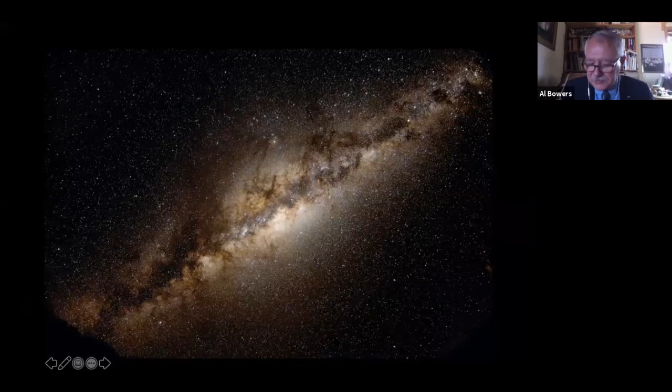The presentation you're going to get today is based on one that I give to students. I talk a little bit about myself and try to get them to take a risk, put themselves out there, and sometimes that's difficult. Many of them are afraid of making mistakes. We train kids at school that getting the right answer is the most important thing. That's not necessarily the case. You really want them to be able to use their imagination and creativity to try and find solutions to problems. Einstein understood this very well: imagination is more important than knowledge. You'll see that occasionally I pull in ideas from people who had really brilliant ideas along the way.

A little bit about me. I was not a native English speaker. When I came to the United States, the only language I spoke was Japanese, and the first day I had to speak English was actually my first day at school.

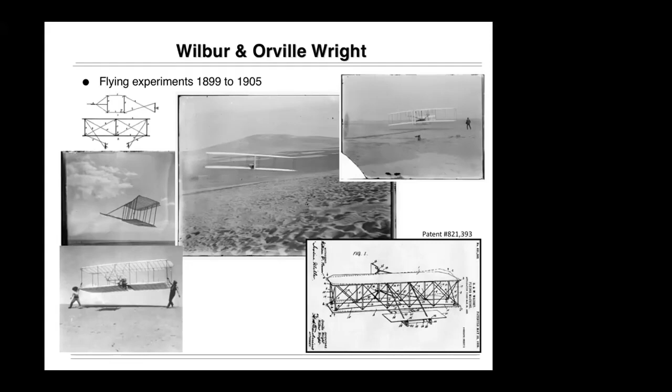It was the control of the aircraft—being able to control the roll and the way they used the rudder. There was a misperception at that time because everyone thought airplanes would turn the same way trains did, and automobiles for that matter. A two-track vehicle simply turns its wheels and moves in yaw, but that's not the way aircraft turn. Aircraft bank to turn, and the Wrights understood this because before this they were building bicycles, and they understood what it was to bank in order to turn—they were trying to do the same thing with the airplane.

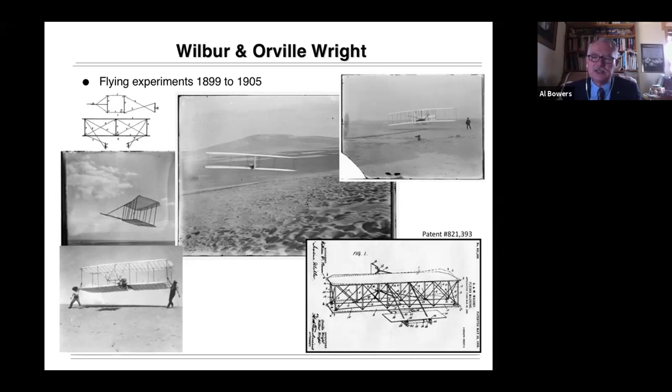Why did they have this problem with more lift and more drag? Ludwig Prandtl is the first one to come up with an analytical tool, which he calls lifting line theory—an analytical tool for wings. Prior to this, if you changed the wing, you had to go back into the wind tunnel to see what those changes did. Prandtl gave us the tool that allowed us to calculate the effect of changes to the wing.

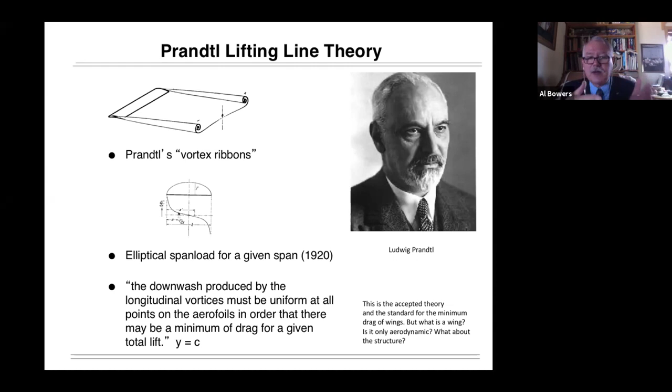We all know that the feathers on birds are very soft at the tip, so we know you can't carry a very large load there. In the elliptical load case, there's a very large load that disappears very abruptly right at the wingtip, and because of this, we have wingtip vortices. We still see this today.

Aerodynamicists love these photographs. One of the worst things you can ever do is go to a dinner party and ask an aerodynamicist about those wingtip vortices—it will be the last thing you talk about for two hours.

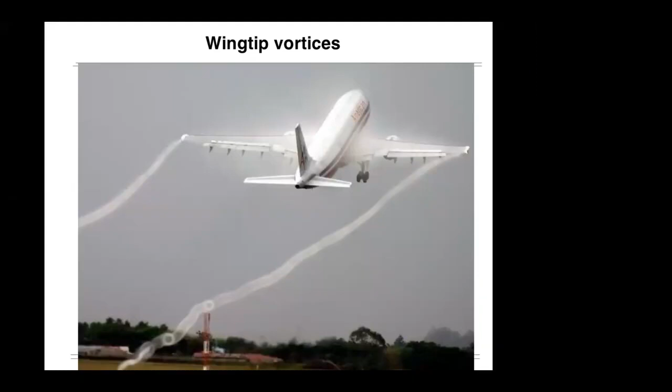There are hundreds, if not thousands, of these photographs on the web because of this particular way that we design aircraft. Sometimes you can see the elliptical load itself, and on rare occasions, you can even see both. Aerodynamicists love this. But along the way, we've forgotten something fundamental about the way birds fly, and we no longer look to birds as a model for flight.

It turns out that Prandtl did another solution for the minimum drag problem, and he did it in 1933. You'll notice that curve C on there is his new solution. Out there at the wingtip, the load comes down and the slope of the load goes to 0 just at the instant that the load itself goes to 0.

This is a different way of thinking about the load. If you think about the feathers on a bird, you think perhaps this load could be the way that it works. There's also something else that happens: the load is convex downwards to a certain point, about 70% of the wingspan, and then the load becomes concave upwards. So you have this inflection point that's at about 70%. There's a reason for that.

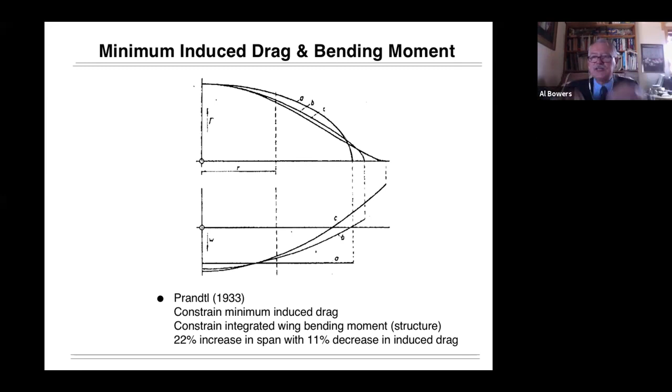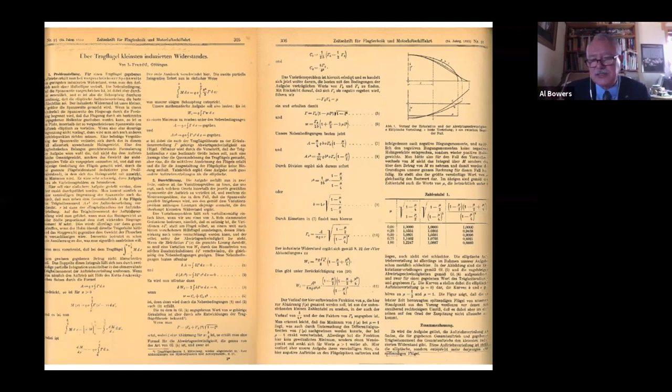So this is the actual derivation that Prandtl does. The amazing thing is Prandtl never references this paper again for the rest of his life, 20 years actually, and there are only a handful of references made to this particular paper. Some of the people we're about to talk about who studied things around this problem also didn't do anything with this particular solution other than to mention the fact that it existed.

When I would read this paper, by the way, my head would hurt before I understood the problem. I could not see how you could end up with negative drag. I had this stack of 6 papers that were sitting on a folder on my desk, and I would just read these papers and struggle with them. I knew there were pieces that were connected between each of these papers to the problem, but I could not figure out what the connection was. I always thought that these people understood this, that to them, the problem was trivial.

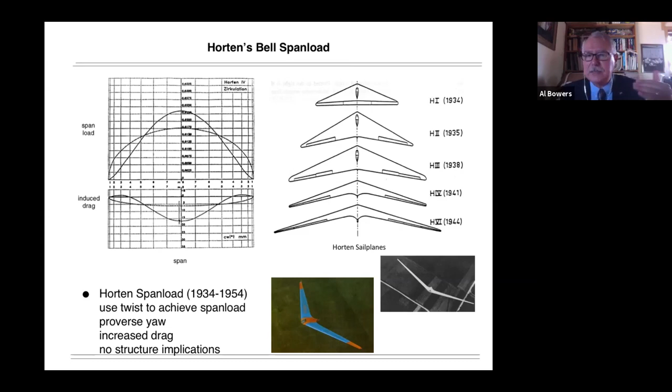And in fact, that's not the case. I remember when I finally did figure this out, that it was actually quite terrifying for me. As soon as I had figured this out, I realized that I knew something that none of these people did. And that was a very scary thing for me.

R.T. Jones, great American aerodynamicist, worked for the NACA and later for NASA. I got to meet R.T. Jones when I was working on the oblique wing. That was also his idea.

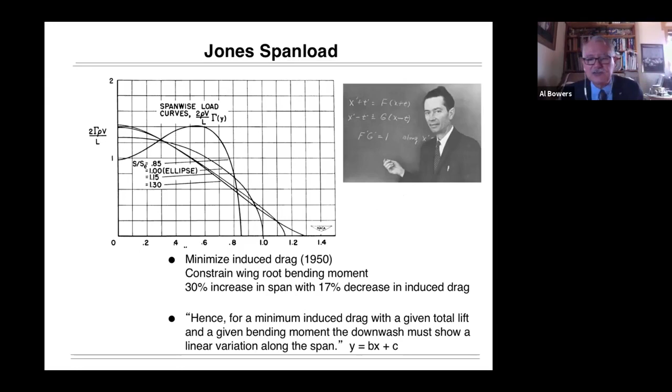Here, he constrains the wing root bending moment, so it's only one point on the structure. It's a unique solution related to the one that Prandtl did. Jones published this result in 1950.

Klein and Viswanathan published a minimum drag paper where instead of using the bending moment, they used the integrated shear on the wing in order to try and constrain the solution.

Something I should mention unique about this result: all of these people I'm talking about here are dead, except for Satya Viswanathan. He is still alive, he's 73 now, and he's actually very funny to talk to, hilarious. We should probably call him up and find out how he's doing. He runs a desalinization plant in India, where he's from, and provides fresh drinking water to the city where he lives because of this plant he's created.

And this was one of the last solutions that got solved. When he heard that we were actually building some of these vehicles to try and look at the span load other than the elliptical, he got very excited. It was actually quite funny, an amazing thing talking with him.

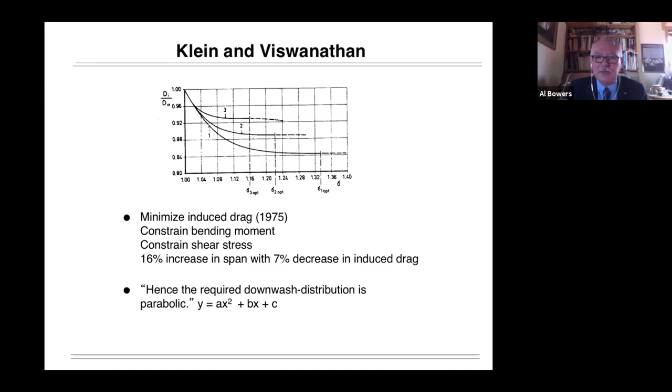And even though Whitcomb had all this data pointing to this solution, Whitcomb never said this. This was the key piece that I suddenly realized: how you could get an induced upwash on a particular part of the wing, and end up with a negative drag, with thrust. This is what birds were doing, because if you increase the lift in this case, you would increase the thrust. And if you could do this, then as you lift the wing up, that wingtip would move forward and you wouldn't need a vertical tail.

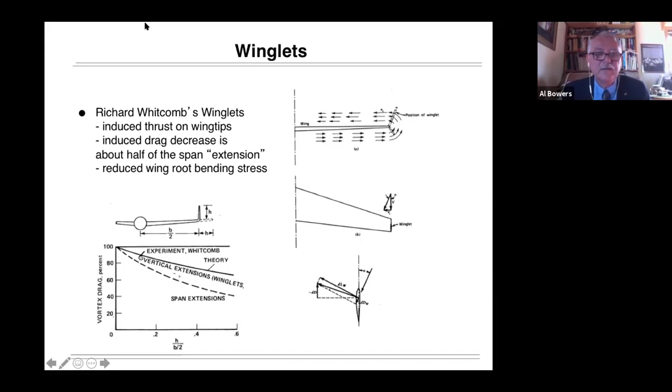Okay, how would we prove this? We need flight mechanics to show this. We call it proverse yaw instead of adverse yaw. How would you quantify the amount of proverse yaw, and where in the envelope would that occur? And then could you prove that you were actually getting the aerodynamics that correlate with Prandtl's 1933 paper? And then we wanted to show the connection between Prandtl 1933 and bird flight.

And so what we ended up doing, when I first calculated this, I couldn't believe it would work. I knew what rudder pedals were for. I flew sailplanes, and having that understanding, I knew that if you just used roll control, the yaw would not be correct.

I had a student working for me at that time, a kid named Mike Allen. In fact, I had a short conversation with Mike this morning on Facebook. And Mike said, give me those numbers, I know this will work.

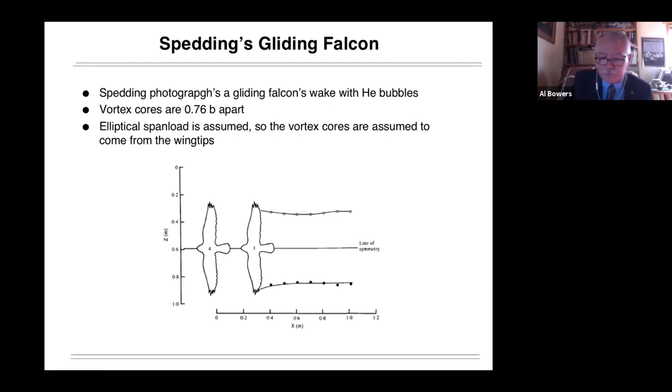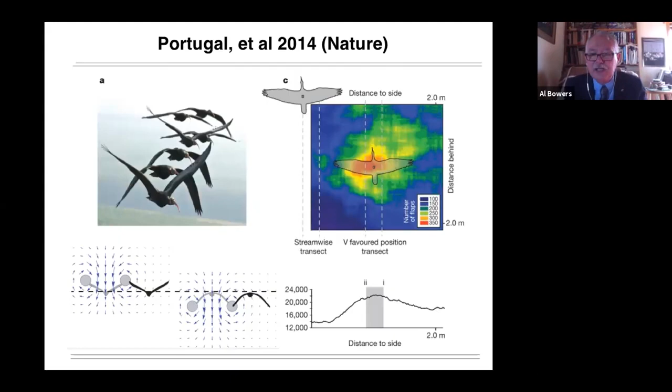There was a paper in January 2014 published by Stephen Portugal and Jim Usherwood, and they were looking at the northern ibis. Again, they were looking at what the overlap was between the wings. There were other people that had done similar things — Hainsworth, Cutts and Speakman and Banks.

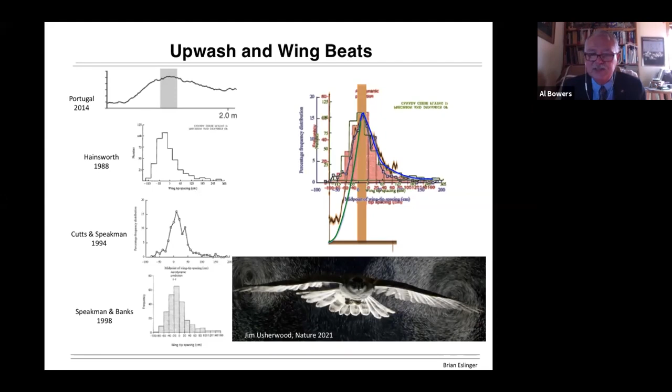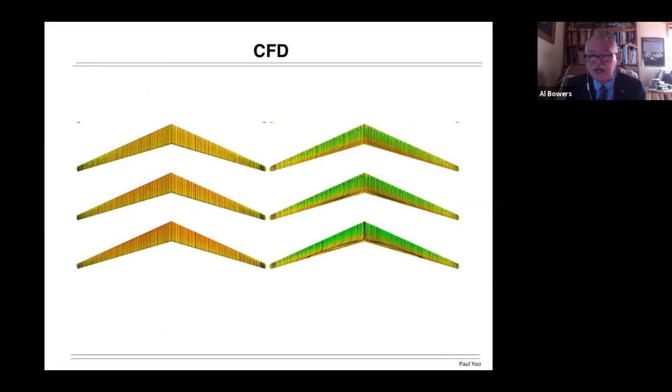It turns out that the first person to describe the twist in the wing of a bird was Nachtigall, a German student studying at UC Berkeley. He published his paper in the Journal of Experimental Biology in 1966 on how much twist was in the wing of a bird—these were pigeons. The amazing thing to me is, if someone had actually calculated the lift from these birds, we would have known the answer in 1966, and you wouldn't be sitting here listening to me now. But no one did it in all those years. So I happened to be the first one to stumble into this answer, and it was only because I had almost all the information. There was about 20% of it I still had to figure out—the thread connecting all of these.

So we've turned this into a technology and built it into these little gliders and instrumented them, fully instrumented. And we actually went out and found that indeed we have proverse yaw.

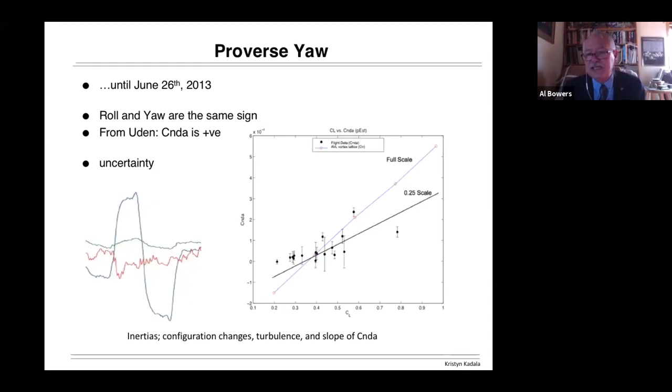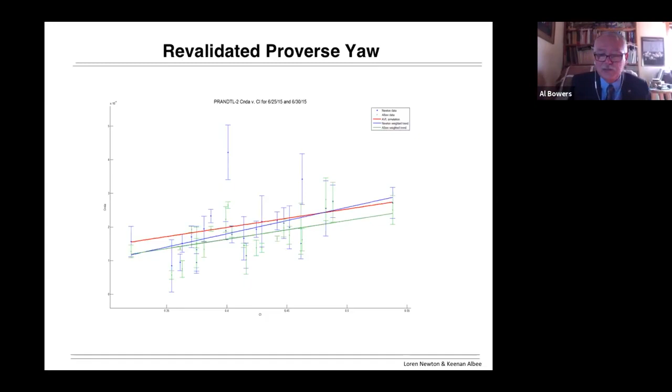We did this in 2013, by the way, and that was the first indication that truly this yaw and roll were connected the way we thought. So in 2015, I did this with students again, and this time we had 58 data points. I had two groups, and we ended up with the red line and the green line—excuse me, the red line is the old Prandtl data, and the green line and blue line are the two teams of students. I forced them to have their uncertainty on each of the data points they generated. So this was the way we knew we were on the right track.

We have another, larger vehicle that we put some aerodynamic test equipment on. We had fiber optics to actually measure the deflection of the wing, hoping we could invert that and solve for what the load was. Unfortunately, the noise in the system was a little too large—I didn't design the experiment correctly. I made the wing too stiff for the sensitivity of the deflection equipment they had.

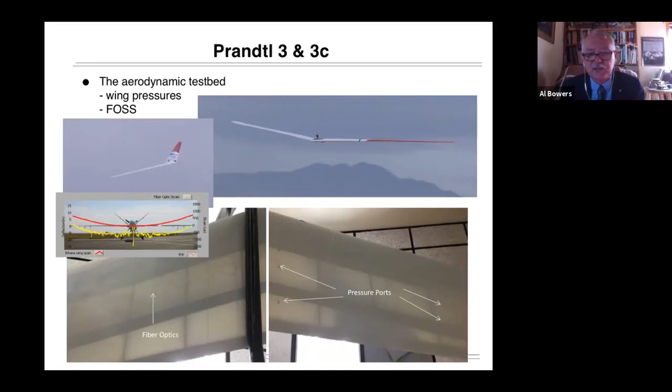On the other wing, we had a series of pressure ports, and we actually built—oh, I want to show you. Let's see if I can make this do this. Okay, this is what it looks like when it flies.

This is the second flight of this vehicle, by the way, with a large rubber band launching the vehicle. It weighs about 25 pounds, with a 25-foot wingspan. We're off the rubber band now. The deflection of the control surfaces is direct from the little control stick on the radio control unit to the vehicle itself—there are no feedbacks.

We're not augmenting the data coming into any sort of flight control computer or anything—this is strictly from the stick to the control surface position. And you can see how well behaved the vehicle flies.

It was a day just like today.

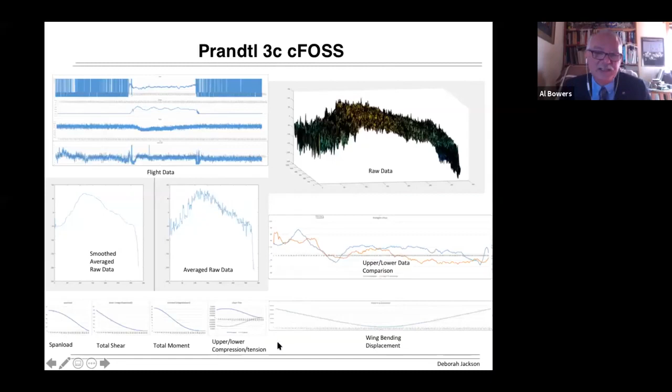So this is the FOSS data. You can see the amount of noise that's in the system. I just could not get this to work the way I wanted.

This is the pressure instrumentation that we installed in the vehicle, and here's the actual pressure data that we got over the wing. The upper left is near the center line of the wing, and the lower right is all the way out at the tip. The red is the upper surface and the blue is the lower surface. If you measure the area of each one of those, that is the lift at each point. You can actually see how the lift tapers off as you come from the center line out to the tip.

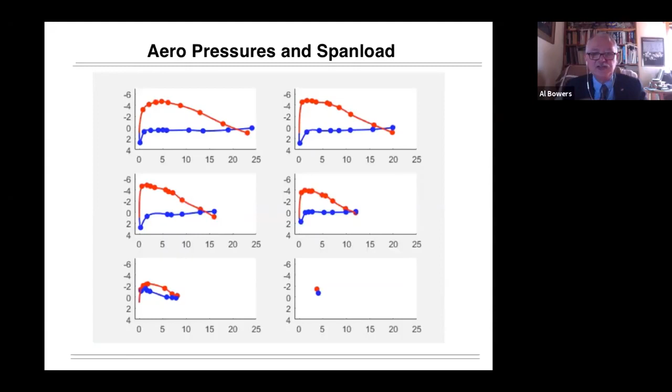And in fact, this is what it looks like when you get the data back. You can notice out near the tip that the red and the blue do not necessarily stay where they're supposed to be, and that's because of the deflection of the control surface.

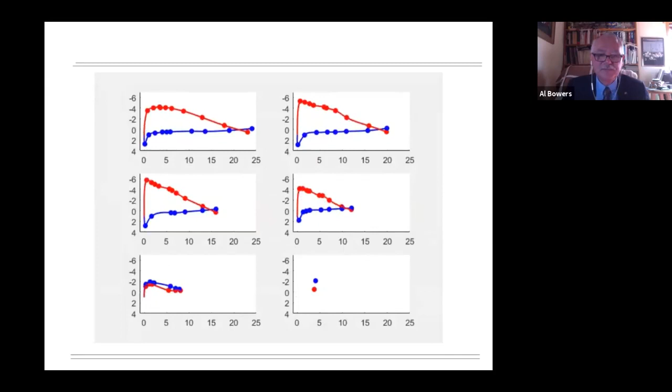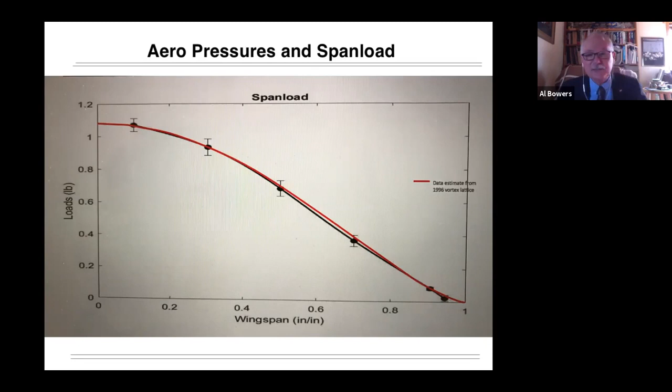So this is what we actually got for the span load. The red is the 1933 paper from Prandtl, and the black data points are what we got out of our experiment with the uncertainty bars. I was over the moon when we got this result. This was just an amazing day when we got all this data.

We have a large vehicle that actually flies. It's intended to be a hang glider. It's only flown a few times, but it's the most mind-blowing thing to see someone actually flying in something that you've created in your own mind. I was quite blown away this particular day watching it fly.

It flies beautifully at about 30 miles an hour. We towed it with a pickup truck, and every time we would stop the pickup truck, they would release the tow rope and the glider would just glide down. It was really incredible to see this happen.

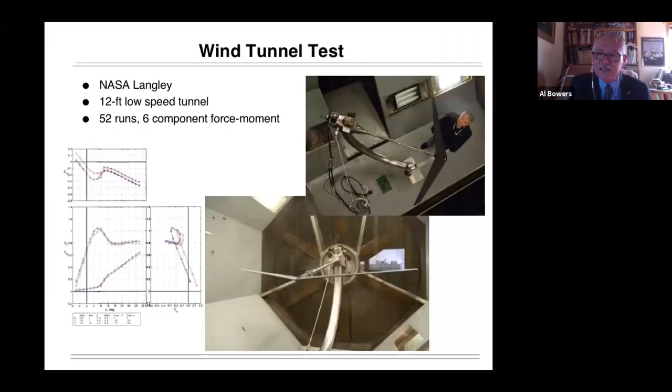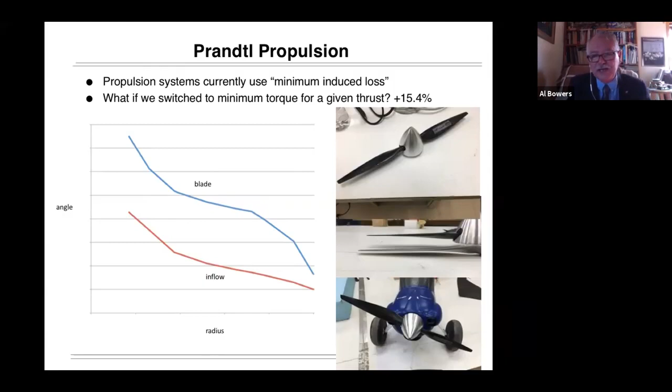We have wind tunnel data. It was tested in the 12-foot low-speed tunnel at NASA Langley. If this works for a wing, of course it would work for a propeller blade as well. You get a slightly different solution because of the forward advance of the propeller blade through the air, but it does work. Again, all my students along the way, all of these students are just amazing.

Real quick, there's a total efficiency increase. If you do everything - the increase in the wing efficiency, eliminate the tail, and increase the propulsive efficiency - for aircraft, the total efficiency increase is almost 70%.

In 2011, world jet fuel consumption was about $134 billion. I think today it's about $180 billion. Last year, of course, was a disaster for everyone, but the current consumption rate is right around $180 billion. At that time, $134 billion, we could have saved about $55 billion in jet fuel.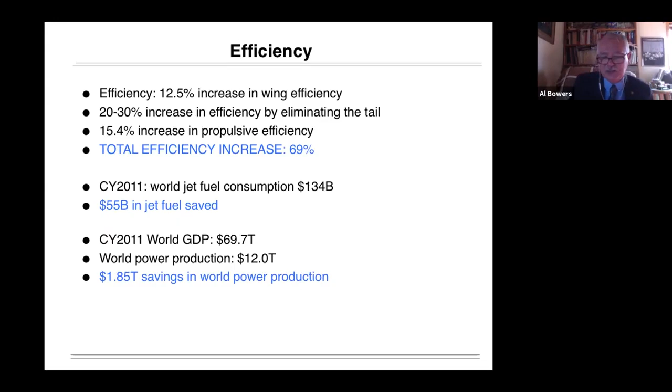So this is what I've proposed, and once again, I'm still talking to bird people, and they're the ones that seem the most accepting of it.

Oh, by the way, in 2015, my students showed up with a can of paint, and the chief scientist's parking spot was number 21. So the students went out and painted my parking spot, defaced it with a can of paint. And it was that way until the day I left.